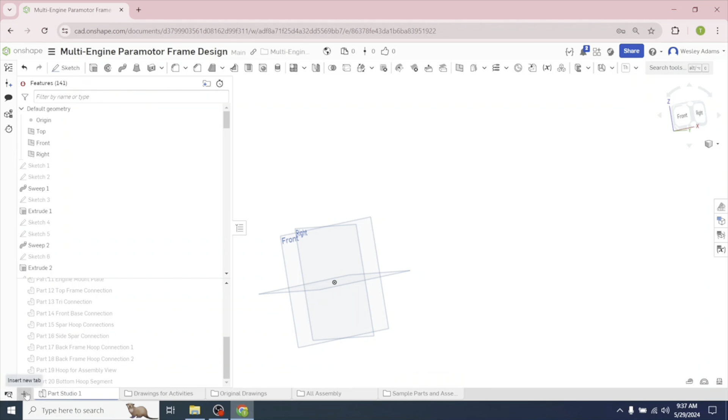I'm just going to leave the original parts and connections in Part Studio. Let's create a new folder. I'm going to call it Sample Parts and Assemblies. Actually, let's just create a new Part Studio here and then we'll move it into that folder in just a second.

Let's go create Part Studio and we can do the renaming and all of that. Let's go to Front View. Let's get our dimensions here. We're going to go left click front plane. Let's go Line Tool. Let's draw this out. So from this area here, we're going to draw a line. We're going to try to get as close to our angle as possible.

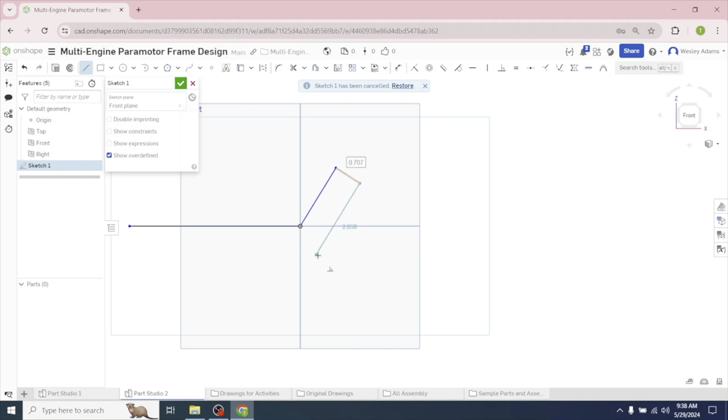There's our dimension there. We'll bring this down. We'll come back around here and we'll set these dimensions in just a second. Let's get our angle. All right, let's set our length here. Let's do the angle at 116.5 at 8 inches. Let's do this one at 2.

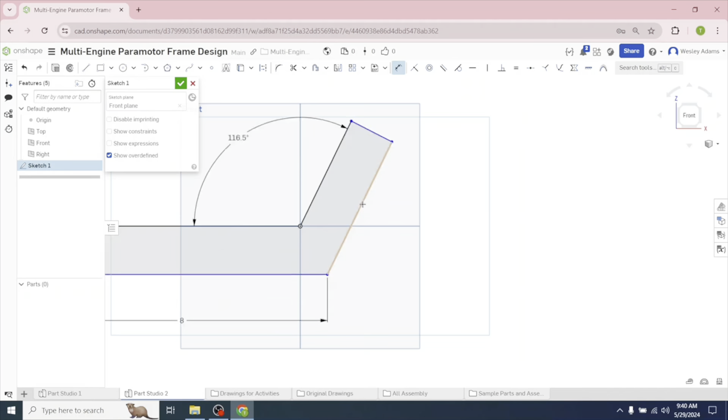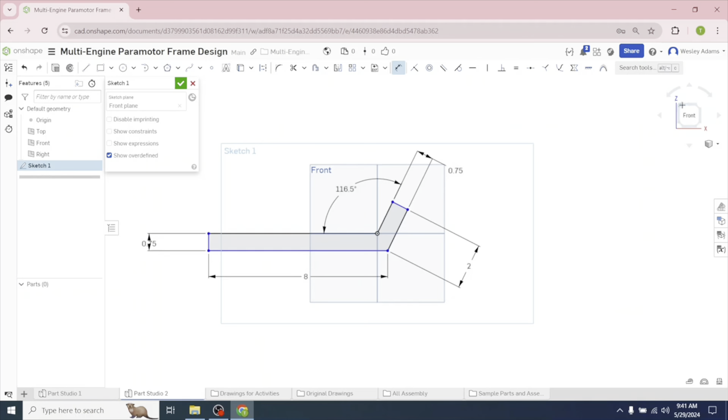These are going to be set at 0.75. This is going to be 0.75. All right, let's close that out. Let's go to extrude. And we'll do this 0.5, so we want it a half inch thick. Let's go to sketch 1. That brings that out. All right, that looks good.

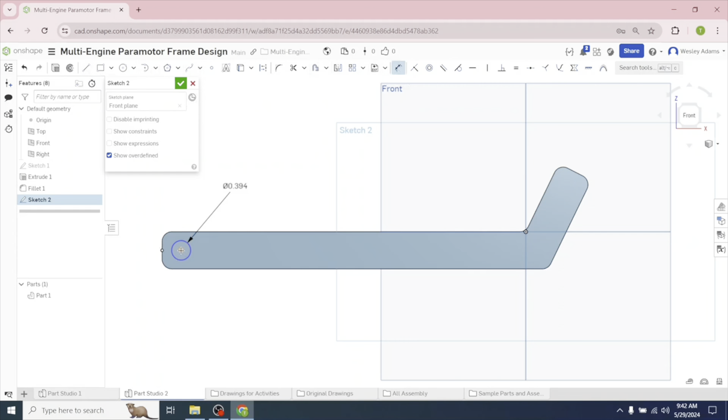So we're going to need to extrude a 10 millimeter hole here, about a half inch from the edge. Let's go to sketch, front plane, center point circle. Let's draw this out somewhere right around here. Hit escape. Let's set the dimension of that circle. Ooh, I was close. 0.394. Hit enter. Select your dimension tool, select down here.

So that's 0.375, that's right in the center. That's where we want it. We'll select right here and let's go 0.5 inches. All right, let's go over, select extrude, sketch 2. We want to remove. Let's go the opposite direction.

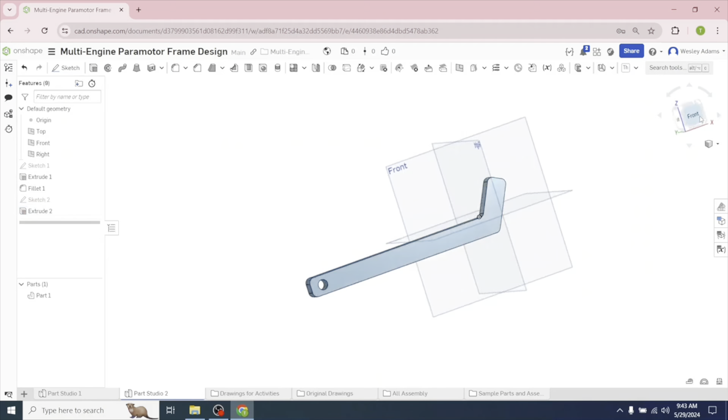Close that out. All right, good. We've got that. Let's go to front plane. Left click sketch, left click line tool. We're going to go here, here. We're just going to copy that. Perfect. So we're going to make these parts without doing the fillet tool.

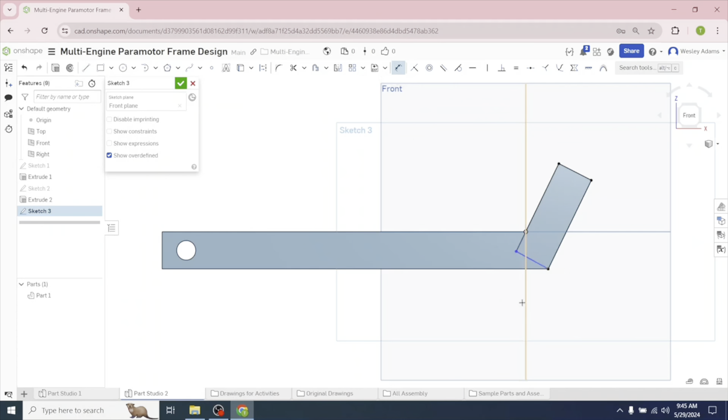We'll do it last on all of them. Go over to our dimension tool. I'm going to set that at 0.75 exactly. Good. This one needs to be 0.75. Good. That length, keep it 2 inches. And then we'll close that out.

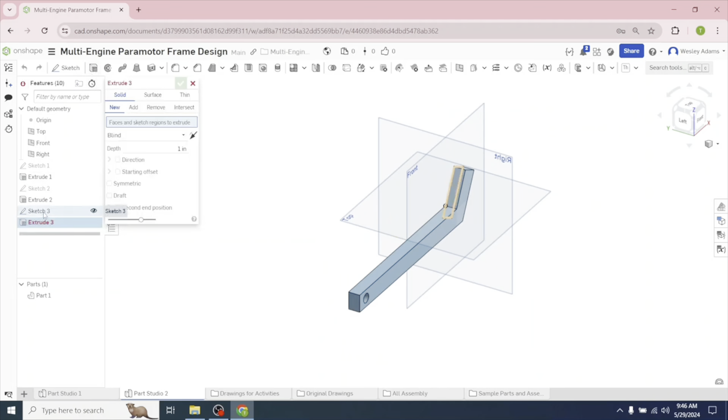We'll go to isometric view. We're going to go to extrude, extrude 3. We only wanted a half inch, same thickness. Good. There we go. Oops. Go back to that extrusion. So something's off. We want new, not add. All right, so that creates a new part.

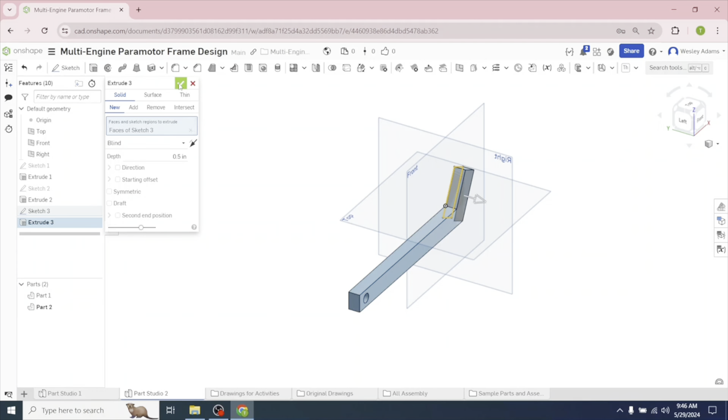That's where I messed up. All right, close that out. And it's fine. We're going to leave it right there, and I'll show you why in just a second. We're not going to move. We're going to take the same length here. Let's go left click, sketch.

I'm going to leave those activated so we can see them for reference. I'm going to click on that line tool. I'm going to select this. 2.5 inches, close to it. We'll adjust the length here in just a second.

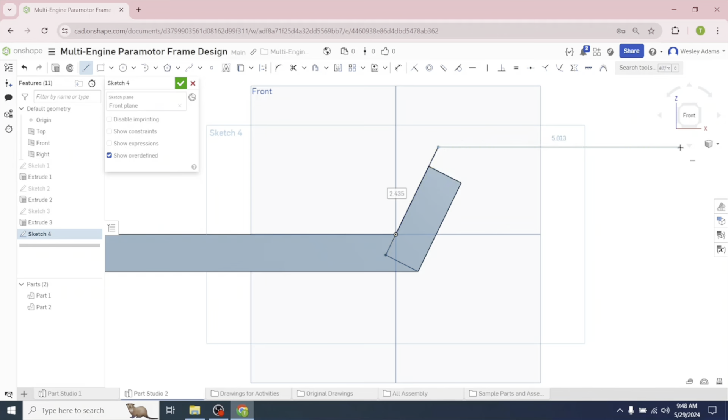We want this at right around 8 inches. Doesn't have to be exact right now. 3/4 of an inch. We'll come back here, here, there. All right, good. Now let's do our dimensions.

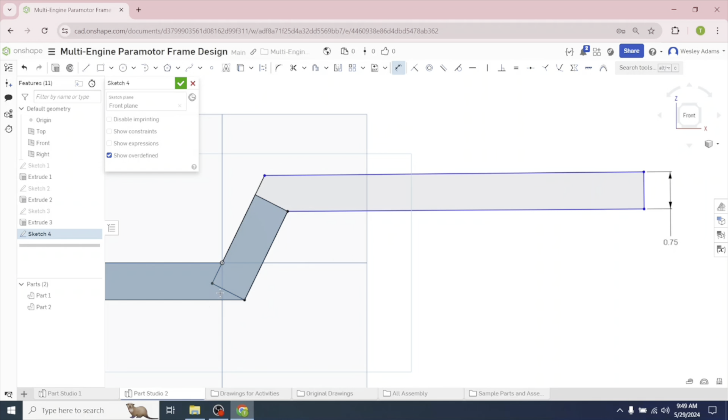We want this to be 0.75. We want this one to be 0.75, and it is. I'm just going to move that over so we can see. Want to set our angle. Should be pretty close to 120. It's right at 116. Let's go 120 on that. I just want to see what that does.

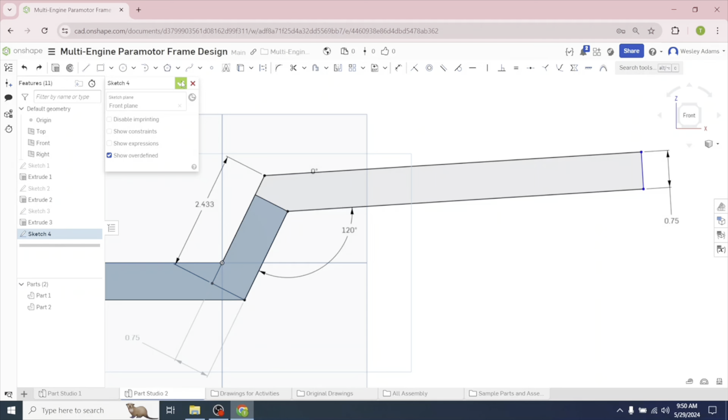Let's set that to 0. What that does. All right, good. All right, that gives us the angle that we want. Let's trying to see if there's any other dimension I need to mess with. Nope, that's good. Let's go over here.

Let's go extrude. Let's select that sketch. Again, we're going to be at 0.5 for thickness. Close that out. Good. There's our swing arm. We're going to go back and do the fillet on each one of these separately.

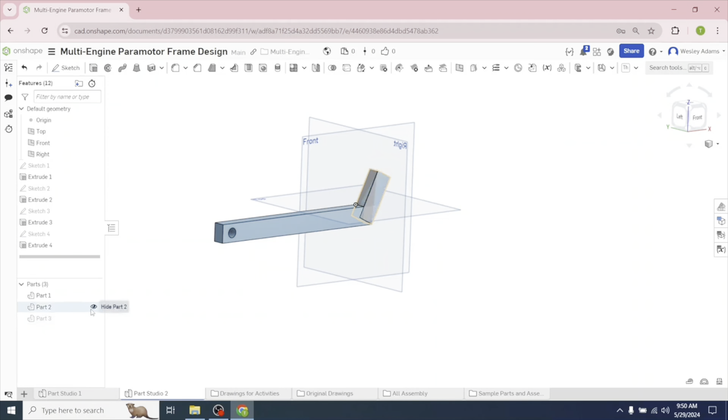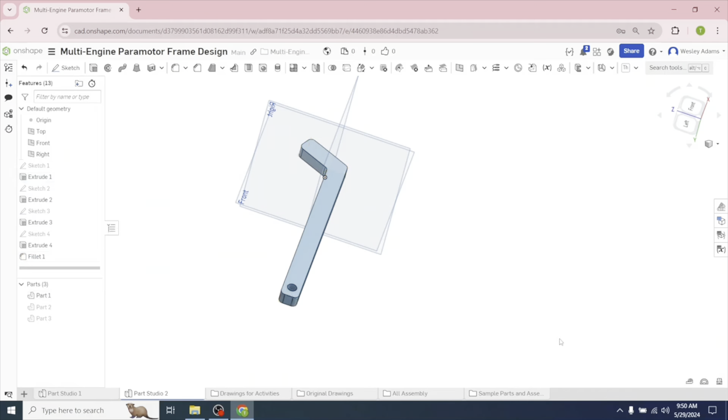So let's go fillet here. We're going to select these edges. Not the sides, but just those edges for each one of those. Let's look at that, see how it looks. Yep, that looks good. Let's close that one out.

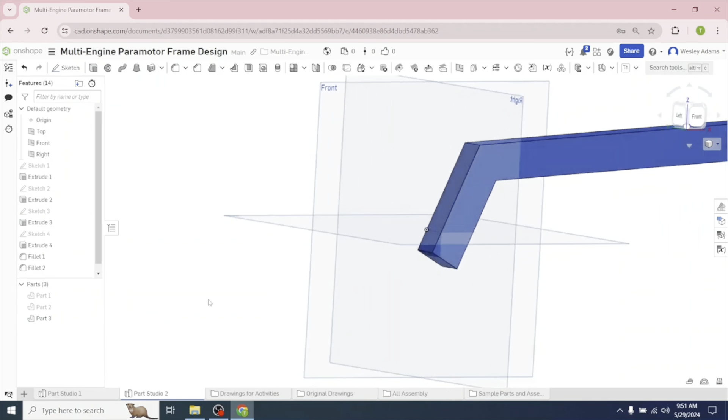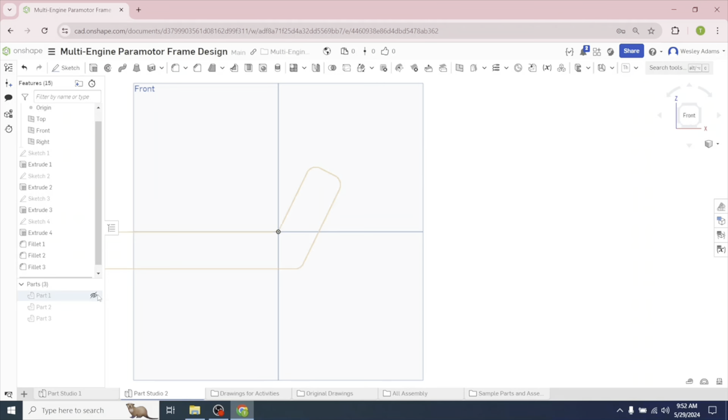All right, let's close that out. Let's look at it. Looks good. I'm going to activate all of those. I'm going to change the color of this one, just so it's easy to distinguish between the other ones in a sec.

Let's go new sketch, front plane, center point circle. Let's go right here. Let's draw this out. I'm going to hit escape, and I'm doing that on purpose so that these are not linked together. So I hit escape. Dimension tool. Let's make these 0.25, because if somebody wants to use an M6 bolt, it'll be close in size. All right, we want that to be 0.375, because that's 3/4 of an inch thick. We'll do that over here.

0.375. We're going to do these extrusions separately than the ones we're going to do up here. It's not going to make much of a difference here. Let's see if it'll let me do this one. Yeah, let's just do that one at 0.5.

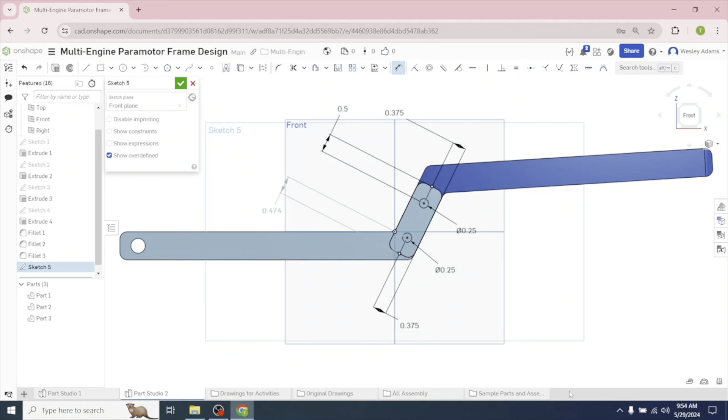Close enough. So that one's really close to a 1/2 inch. There, let's close that out. Let's go over here. Let's go extrude.

Select that sketch. We're going to remove. We'll go the other way so that it goes through that. We need to tell it what parts. Select all 3.

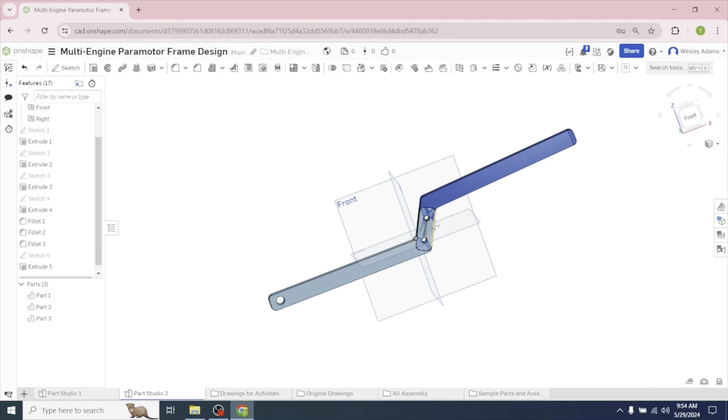You notice they're listed there because we need these holes to go through all 3 parts. All right, good. We're going to create 8 holes across here. Let's go left click sketch, left click front view, left click center point circle.

What I mentioned earlier is extremely important. You see how that's trying to line up with other points on here? We don't want that. Hit escape.

And then draw out the circle. Again, if I start trying to draw out a circle over here, it's going to start trying to line up to other parts. I don't want that. Hit escape and start a new center point circle each time.

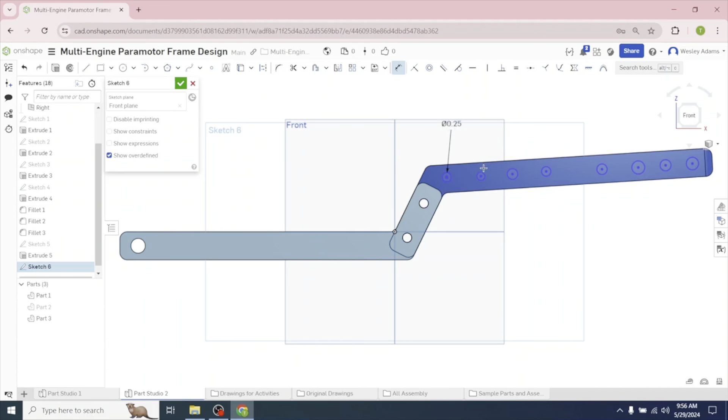All right, so we've got 8. Escape. Let's go to the dimension tool. Let's set our size at 0.25. Between that and that at 0.375.

All right, before I do that, I want to set the distance between these at 1 inch. I'm going to do that for all of these. All right, there we go.

Good. That looks good. Now let's set the distance of each one of these from the edge.

It's going to be a lot of numbers here, and I'll reorganize it like I said earlier to make this look better. And this is constraining those so that they will stay right there once we're putting this last measurement.

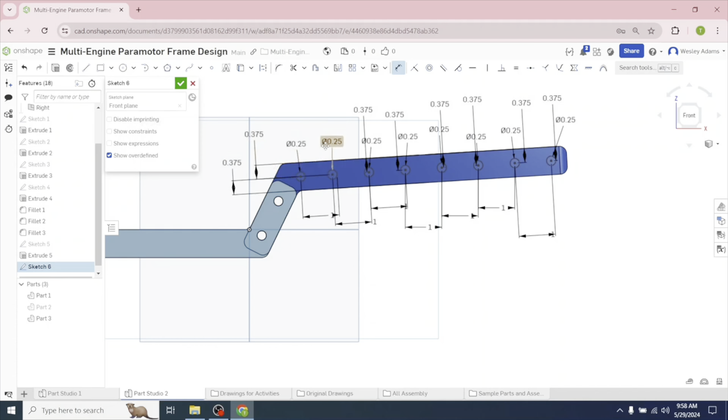All right, so we've got those. They're all constrained. You can move these around as needed to organize that to make it easier to view. Let's go extrude.

And let's go solid remove. Select the sketch we just created. We want it to go in the other direction. Good. Close that out. And there's our swing arm.

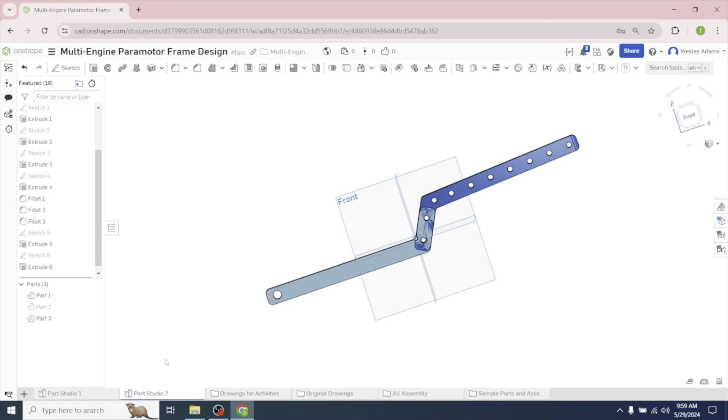So we've got the parts created. And let's go down here and rename these so that we can distinguish. Rename. So that's going to be our swing arm frame segment.

So we'll call this one the center spacer. Let's call it harness segment.

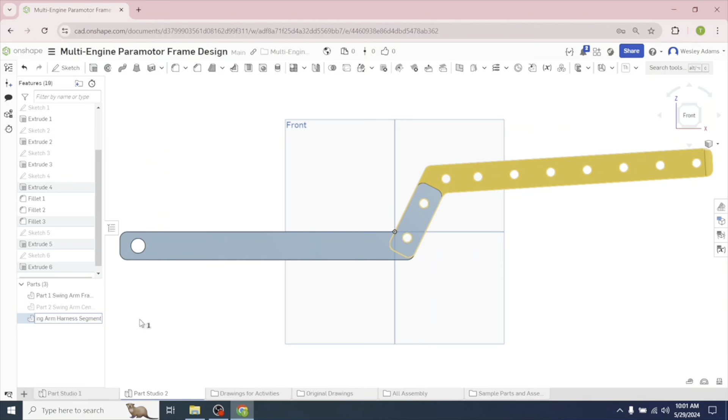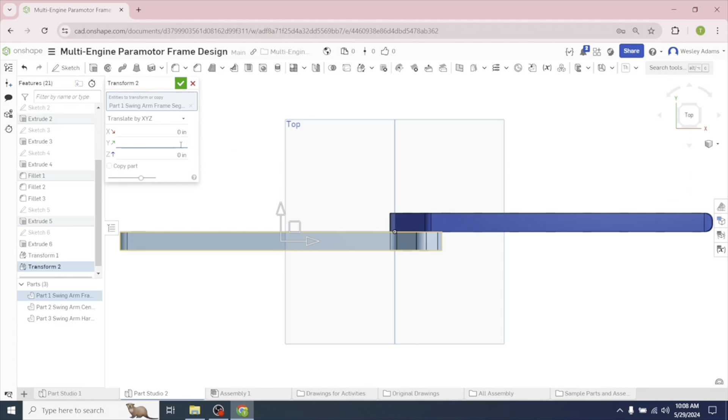We'll move that over a 1/2 inch there. We're going to take one, we're going to move it a 1/2 inch. So let's go transform. Let's go X, Y, and Z. We'll move it in the y-axis, 0.5, or negative 0.5, negative 0.5. Let's close that.

Let's make sure those all look like we want them to. Yeah, everything's matching up. Let's go ahead and export those, and we'll print those off, and we'll try to cast them. So let's export each one.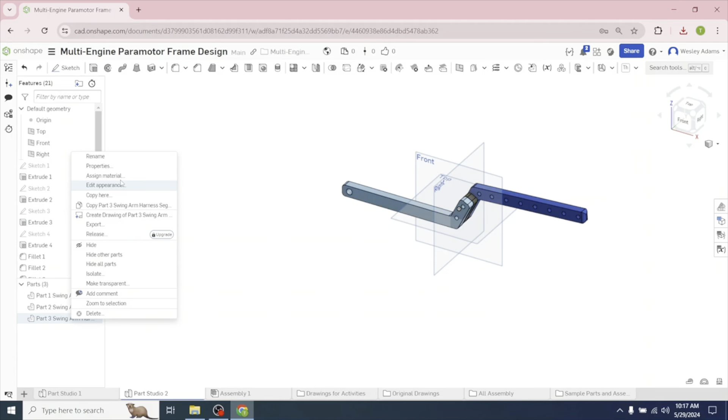Import, let's lay that one down there. We're going to need 2 of these, but let's just see if we can fit one swing arm on here.

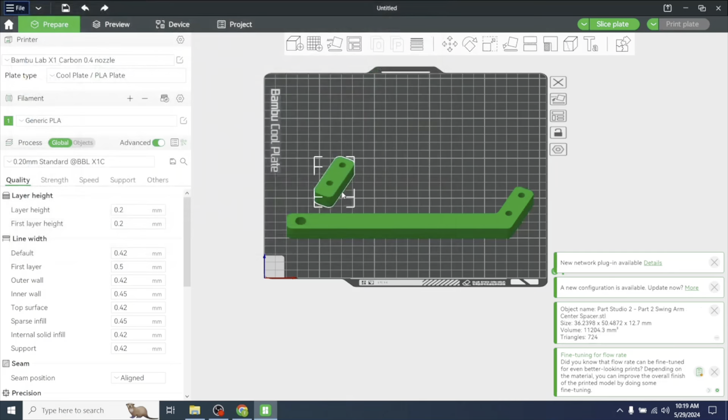That one's too close, so I think we can do a whole swing arm on this plate. Let's go. Might be able to fit all of them on there, but I don't want to print them all until I know we've got what we need.

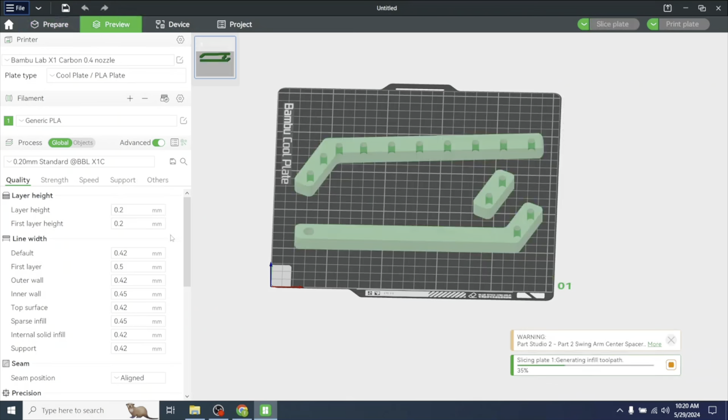So I'm going to go preview. I don't think any of these will need... all right, so we've got one that's still too close. I don't think it's going to create a problem, but we'll spread it out because it recommended it.

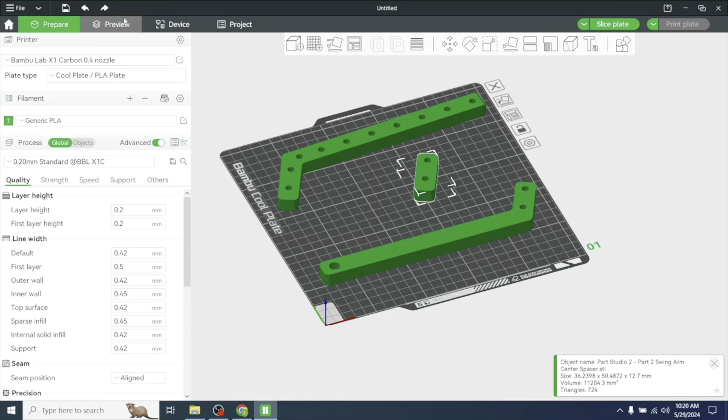Let's put that one right in the center. All right, let's preview again. That looks good. We'll go to print plate. I've got to go turn the printer on and prep the surface, and then we'll print it off.

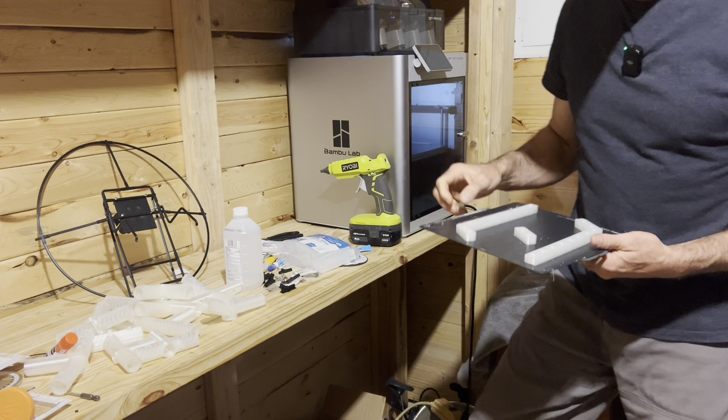This is what we're going to experiment with. We're not going to cast this one. This one's going to stay. I probably should have just printed that one in PLA,

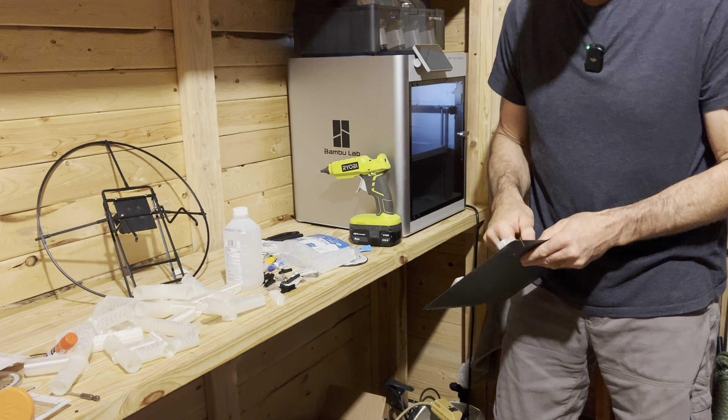because that's going to be our spacer. I guess we could do the spacer if we wanted to, but these two are the ones we want to print. So there's that part one, and here's the other part.

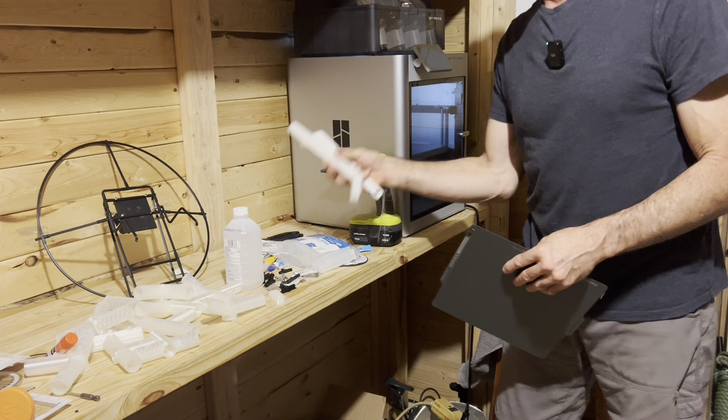Is flip or cut a piece out. So let's flip that over. Lay on this face for right now. So I want to cut a piece out of this.

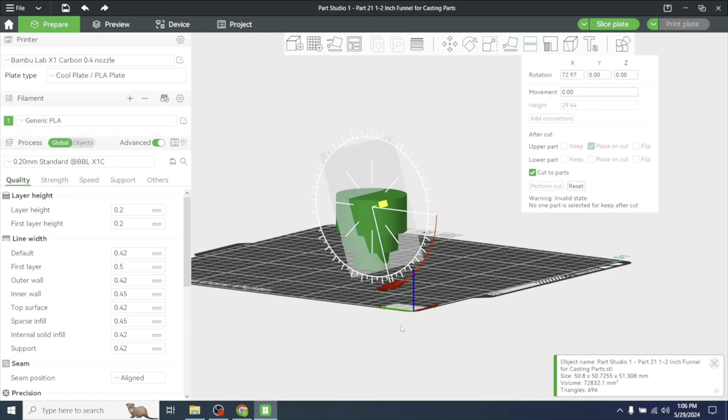Down. So what I'm going to do is create a cut here at the angle that I need so that I still have that bottom part. Let's see what that looks like now.

I want to place a cut. We want to keep the lower part, so that's going to be this portion. And we also want to cut to parts, so we need that set. And let's go perform cut. That's the piece we want.

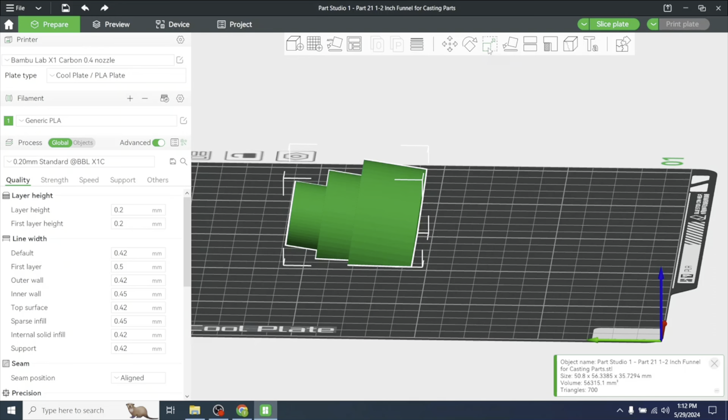Let's look at lay on face. Let's lay it on that. Let's see what our angle is. We should need two of those. Let's clone that.

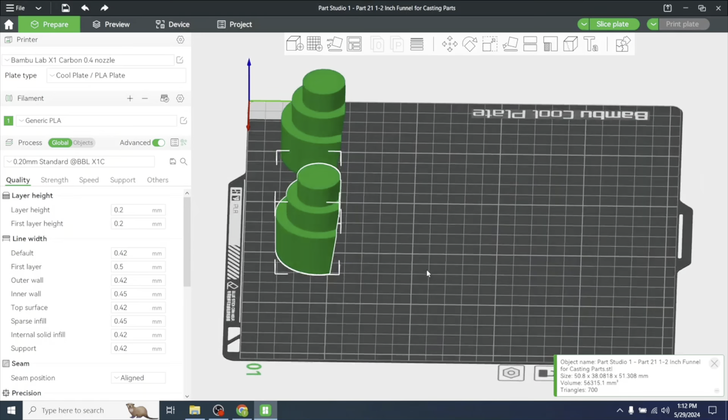There we go. And the good thing about this, we didn't have to go in and change the original, so if we still like the original, we can go back into Onshape, or we can just import. Let's clone that. All right, let's preview that.

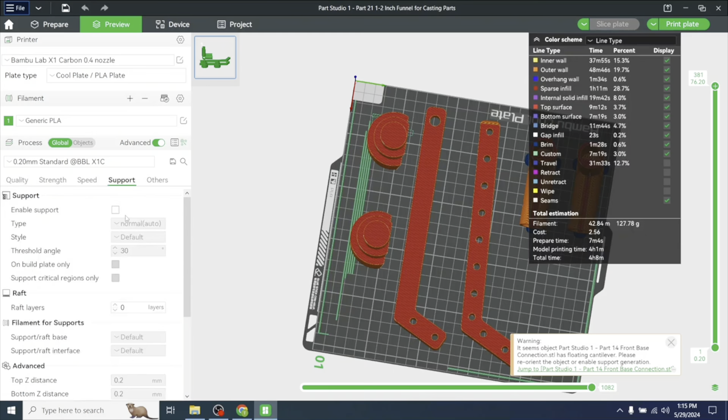All right, we are going to need supports. So let's go enable, build plate only. Let's preview that again. I think we're good there. Let's go ahead and print.